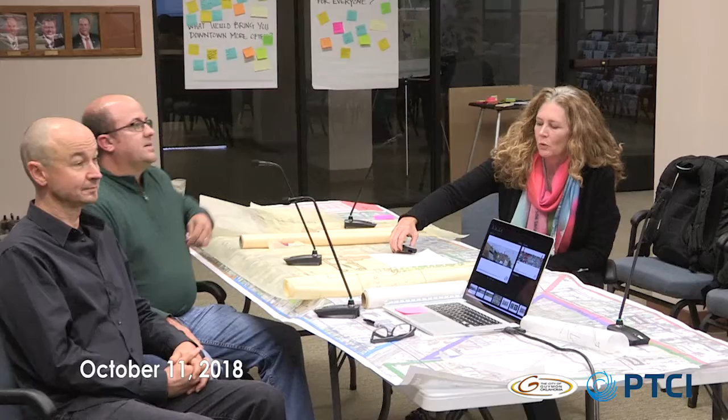Sure. So we heard a lot last night, and throughout the day, let me get this microphone a little closer to me. We heard ideas that people have for not just what they expect their streetscape to look like, but how they expect to use their streets within downtown and what some of those changes might look like.

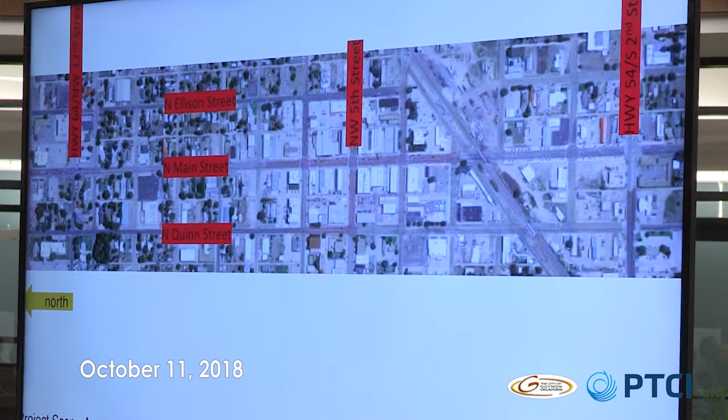So hearing all of that, we looked at the overall study area, which goes from Highway 54 all the way over to Highway 64, which is also 12th Street. And we're focused mainly on Main Street, but because of the two parallel streets, Ellison and Quinn, and how these land uses all relate to each other, we looked a little bit beyond and took into consideration the side streets.

We did focus on what we call the core area, which is really around 5th Street and 4th Street because of the concentration of commercial uses right there, as well as the brick streets that people are so familiar with. So a lot of what you're going to see in these next few slides are options for the way that the streetscape could be addressed along Main Street.

So we're calling that particular area Type 1. We're looking at 4 options for the segment of Main Street that is between 4th and 5th, and then all the way up to 6th and down to 3rd. You'll see some other labels on there. Type 2 are the side streets. Type 3 would be the parallel streets of Ellison and Quinn. And as we get more input from the community, that will influence how we think about other segments within this overall study area.

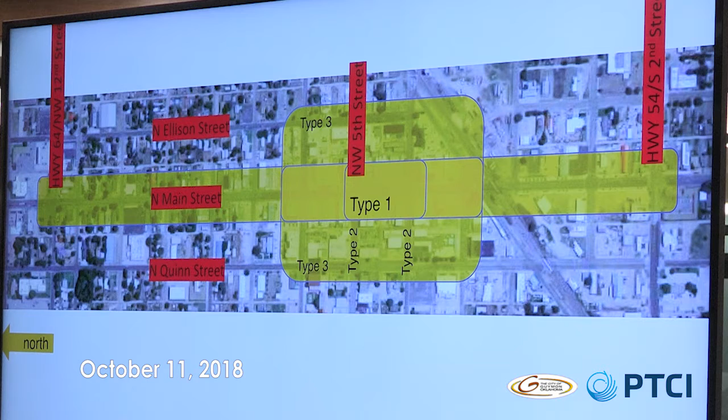So again, we're focused on Type 1 this evening and a little bit of Type 2. That's a close-up of that. You can see Main Street running from left to right there. Right in the middle between 4th and 5th is the American Theater. That marquee, we think, is a pretty cool feature in your streetscape and something to be highlighted, and a key element to always make a focal point within your streetscape.

So just looking at what we're calling Type 1, this is a quick sketch on basically your cross-section. The laser doesn't show up on this screen, but this is a cross-section. The heavier lines on the top and bottom of the page would be your building edges. So everything you're seeing illustrated in between, we're taking full advantage of that space on the street that is face of building to face of building.

And so this is essentially option 1, keeping your current cross-section intact. The kinds of things we're suggesting here are ways to introduce some landscaping, and those would be taking some of the parallel spaces and bringing that curb out to the travel lane where you have some opportunity to plant some trees and give some more canopy to the street. You're also seeing those at the corners, options there to be able to anchor that.

In all of these options, we are suggesting that we do what's called bump outs or bulb outs, and it's a way of bringing the curb line out closer to the center lines of the street so that you're actually making those crosswalks shorter and making it safer for pedestrians or easier for pedestrians to get from one side of the street to the other. In some cases, you're going from a 50-foot crosswalk that you have today and dropping to 33 feet or less. So it gives you some savings in that distance, but also gives you that room for landscaping.

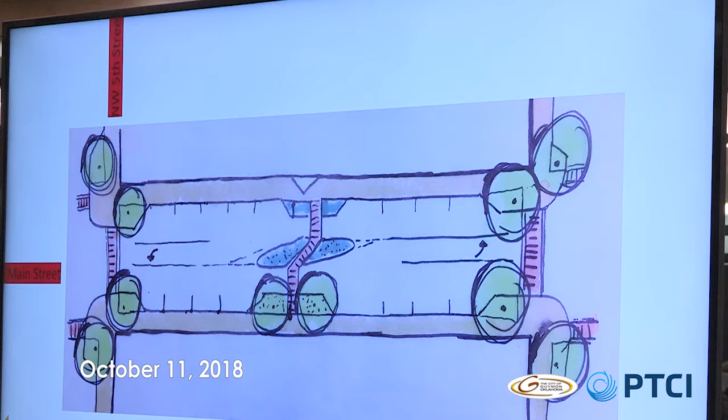If you're wondering what that feature is in the center, that's taking that area that's currently striped in gold paint and suggesting a very short median, and we call them pedestrian refuges.

It's just a place where a pedestrian can cross mid-block, get to that midpoint, and with a landscape median, have a place to actually stop and look at the direction of traffic coming the other way and continue on across. So they're not out there floundering in the middle of the street with traffic coming from either direction. Those are fairly minimal changes to make it more pedestrian friendly and introduce more landscaping.

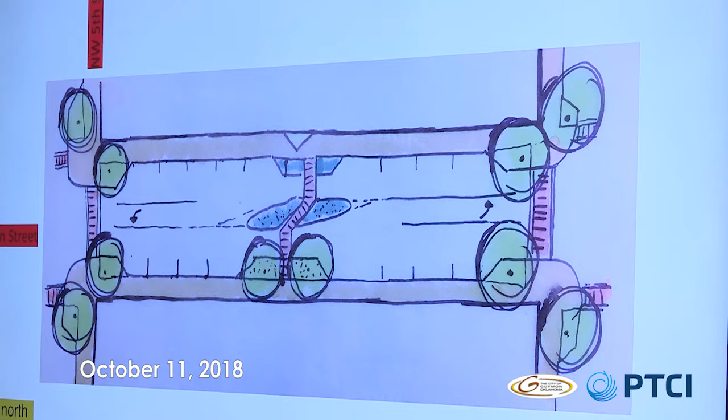You're keeping roughly the same parking spaces that you have out there today, with a couple of exceptions. So we think in our counts we are losing a couple spaces. Here's some illustrations of what those really look like on the ground. The one on the left is more diagrammatic. The one on the right is an actual constructed street cross section, so you can see how the pedestrian movement is facilitated with that short median.

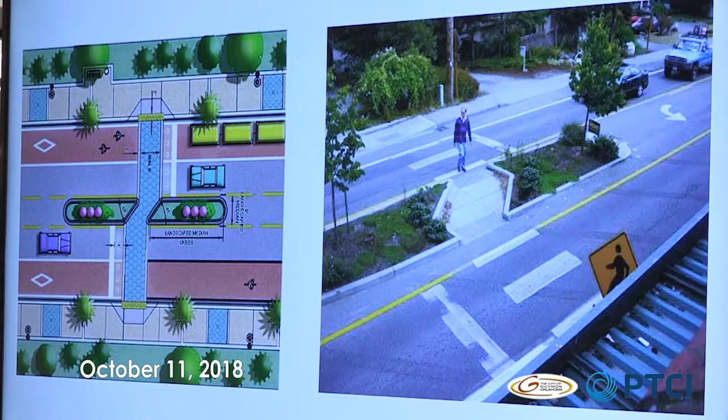Second option also indicates the idea that you would convert that striped section to a median, still with the changes to the corners so that you have the shortened crosswalks and easier movement. The turn lanes are still in place.

Here we are looking at ways of just trying to grab some of those parking spaces at an equal spacing, respecting where the lighting is down the street. We're doing that in all cases. But it's an alternating pattern with the street trees and the lighting, a way to introduce trees as an alternative to those canopies. It may be that as we study this further, you may be able to have a combination of canopy and street tree, but those parallel spaces converted actually helps create those spaces for street tree planting.

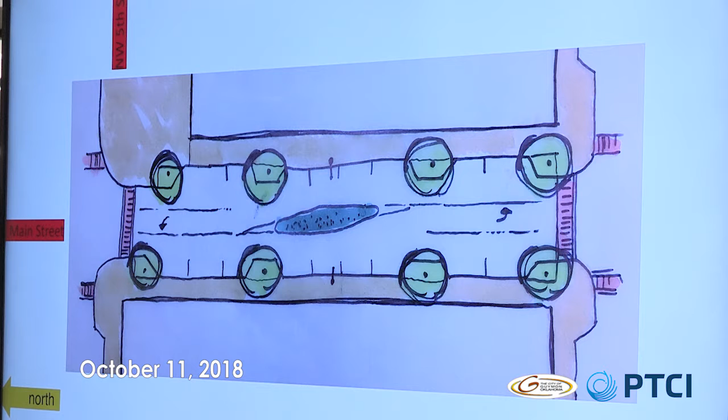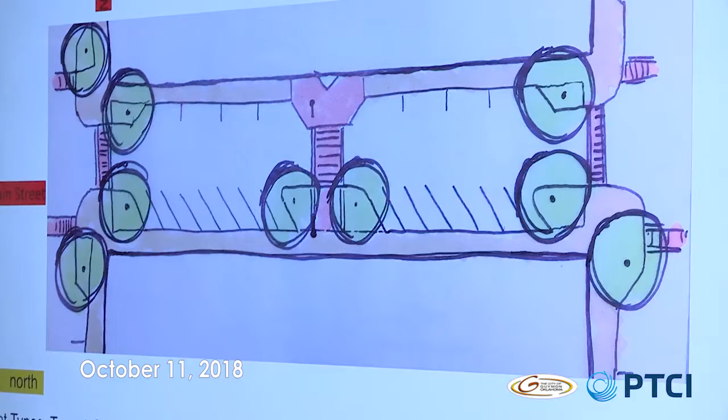Third option, some of those same characteristics are here. The lights are maintained, the new crosswalks at the intersections are maintained. We're also showing a mid-block crossing here. But the biggest difference is the traffic counts we're looking at may not warrant these turning lanes onto the side streets. If you were able to convert back to a 2-lane street without the turn lanes, that gives you ample room to have parallel parking on one side and angled parking on the other to increase your on-street parking. At the same time, you're introducing some places where landscaping can occur.

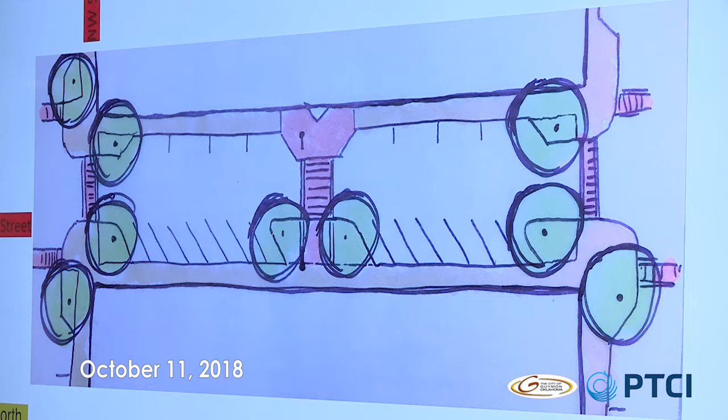And then finally, the last option: we heard a lot from folks last night about being able to slow down traffic, make it even more pedestrian friendly, and find ways to introduce landscaping and some street furnishings. Maybe it's places for outdoor dining associated with the restaurants that are along the street or will be in the future. This is a combination where you see parallel parking and angled parking. Again, the turn lanes are gone, which is where you're getting that space to create this.

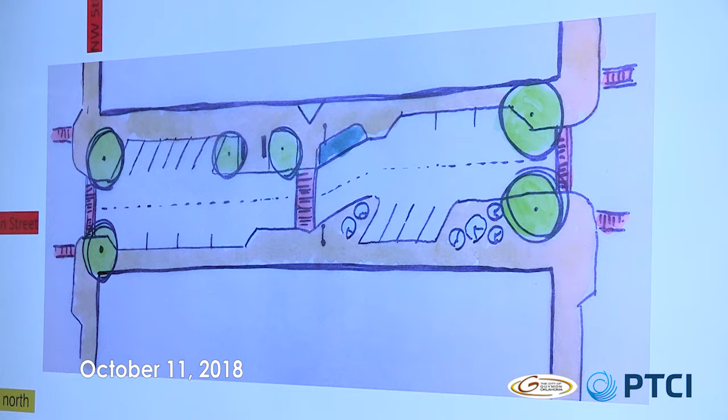But you also should notice a shift. As you leave one intersection, you're more towards the east side of the street, at the top building. Then mid-block, the traffic would shift, and you'd actually be driving closer to the buildings on the west side of the street. That shift actually goes a long way to slowing traffic down. That, in combination with introducing the vertical landscaping and some other elements, also causes people to slow down. So those pieces are there as well.

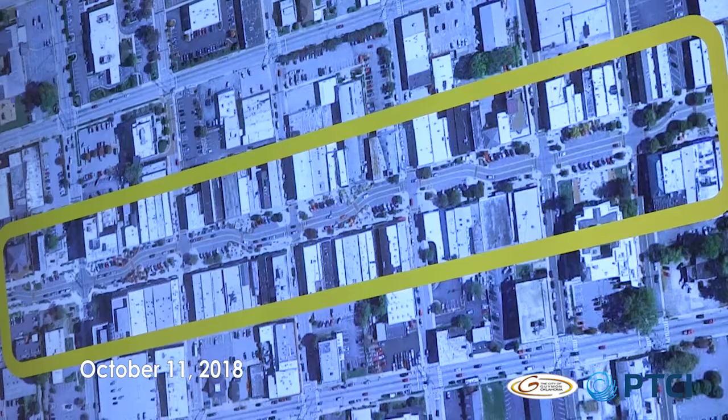That's something we have seen executed well in other cities. This is about a 6-block area in Hendersonville, North Carolina. We show you this because they did it years ago, and it's grown in and really gotten established. So you can kind of see, if you look closely from block to block, how it shifts. As you go through the intersection, you're not shifting - it all happens at the mid-block point.

So we think you've got room to do that if some of those turn lanes go away, to be able to change those curb lines and start to have some of those spaces for a better experience along that street. One of the reasons we want to promote that, whether it's this form or one of the others, is giving people a reason to be out on the street enjoying the outdoors. When people see people and that activity on the street, it's a magnet for other people, and that's good for business. From an economic development standpoint, when you can create these active streets where people are just enjoying being there, more people want to be there as well.

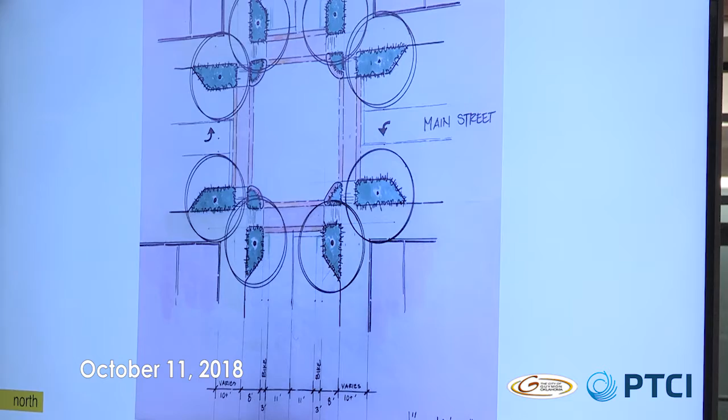So this is a close-up of one of those intersections I was describing. Again, we're not talking about dramatic changes, but just pinching those corners in a bit and making those crosswalks shorter. That's where you stand to gain.

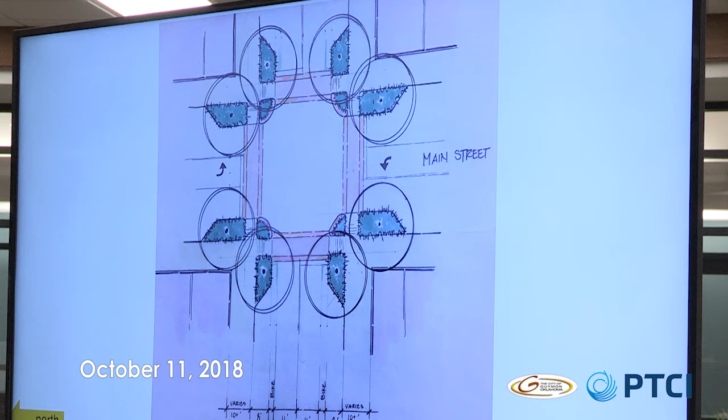I was wondering if I could ask a question. We've got great light standards downtown, not only throughout the corridor, but they're very highway oriented. They're high, closer to a Cobra head design. Has there been any thought put more towards a pedestrian scale light fixture that might warm it up and make that a little friendlier? They're great lights down there, but they're just way up there, not down at the level where people are.

Right, and we see that a lot. Sometimes the obvious answer for some folks is to add an alternating fixture with additional lighting, because you already have so much lighting. That might not be what you want to do. But as we go through this, sometimes more landscape level lighting and uplighting of the landscape or other vertical features might actually add that layer of lighting that highlights things at that pedestrian scale. So you accomplish it with lighting, but in a different form. Maybe lighted bollards or something like that, a lot of different forms, but that's something we can look at as well.

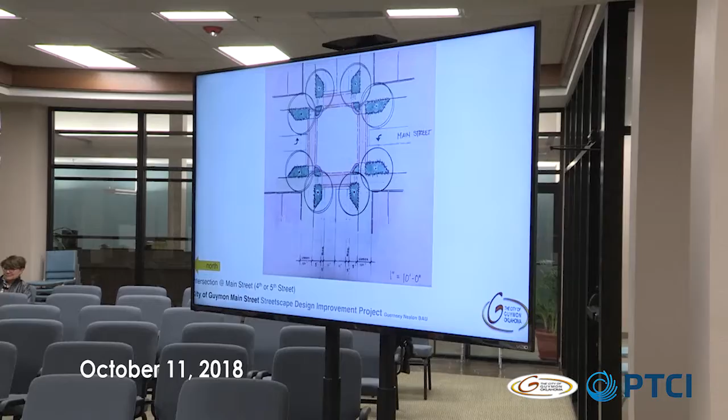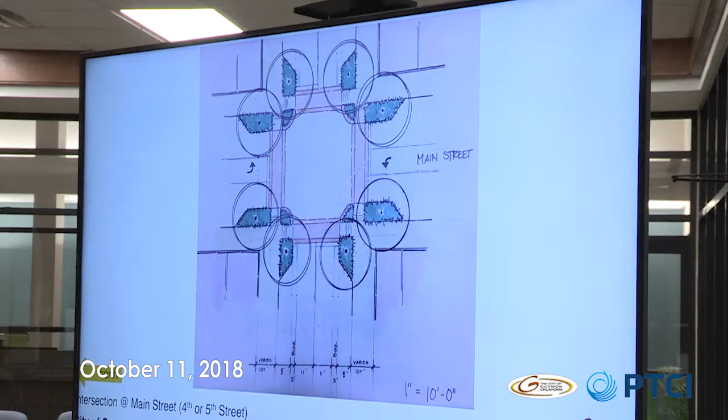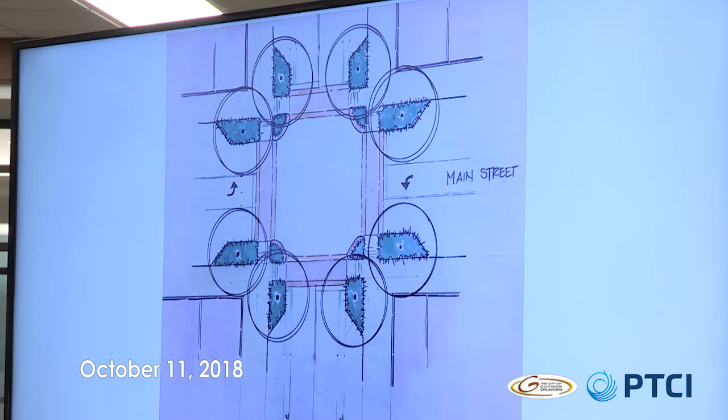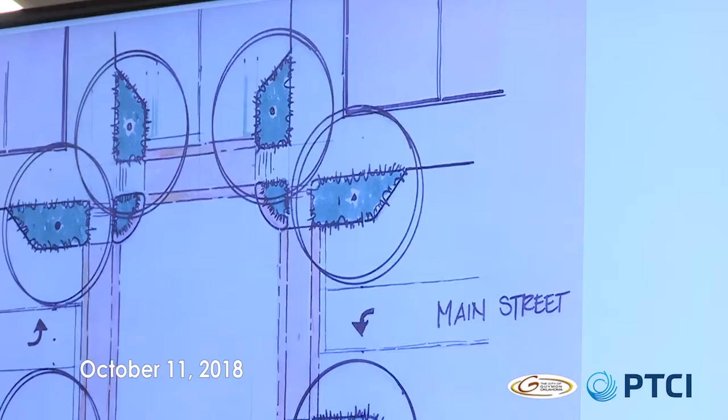The side street, where the brick streets are, 4th and 5th, we looked at that, and in your comprehensive plan there's a suggestion for accommodating bike and pedestrian movement on one or more of those streets. That cross-section, because of the current vehicular lanes, gives you a 14-foot width from center line to the edge of your parallel parking. You can keep your current cross-section where your parallel spaces are and change the pavement markings to highlight where an obvious bike lane would be. With enhancements to your pedestrian paths and striping that delineates the bike lanes, you can accomplish what you're describing in your comprehensive plan, calling it complete streets in some instances. We think you have the width there to do that, and that's what's illustrated with those dimensional lines across the bottom.

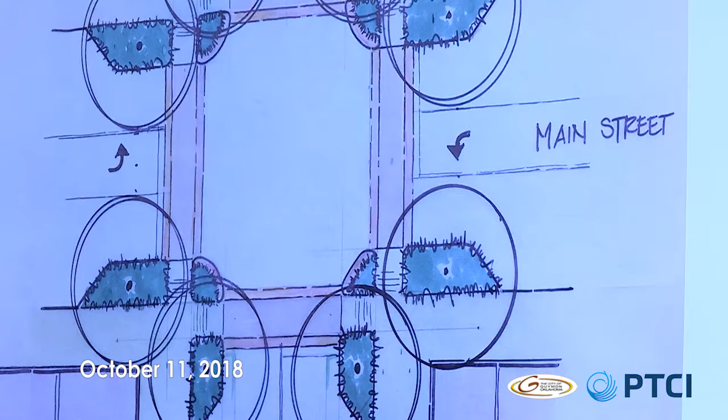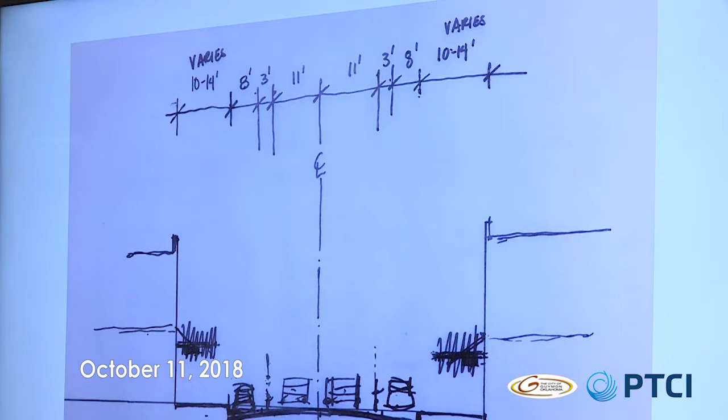Do y'all have anything to add? Okay, so that's a very messy sketch of the same thing. You can kind of see the on-street parking, the two cars driving in either direction in the center, very skinny bike lanes in between them, and sidewalks with no pedestrians yet.

So now there's plenty of details that we have contemplated that Hans is going to talk about that have a more architectural component to them. One of the questions we had was, based on feedback in our community conversations over the last few days, there are people who really enjoy what the awnings out front on some of the buildings achieve for us in terms of shade, more pedestrian-friendly scale, helping control a little bit of the wind.

One of the options we offer is the idea that we could design an awning applied to the buildings over this 2 to 3 block zone of the core of Main Street, something specifically designed for downtown Guymon, which would bring a sense of intention to the awning elements. They could also provide additional downlighting, a place for a system of signage that makes wayfinding easier, and makes it easier for the various stores to advertise and so forth. So we offer this as an option to consider.

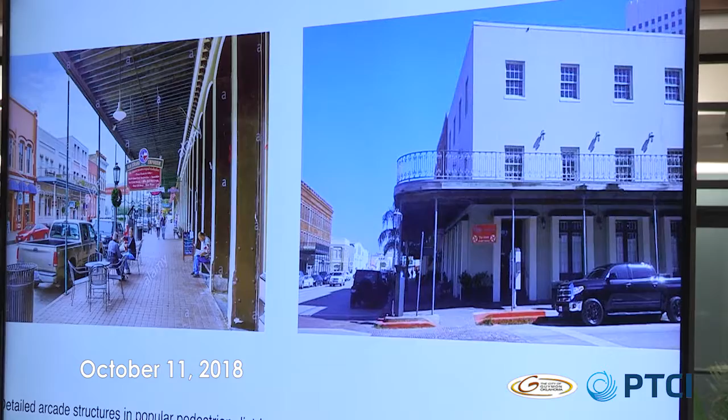There are some really beautiful precedents, especially through the southern half of the United States, the South and the Southwest, for these types of awnings that look intentional and carefully designed. Here are a series of images from Galveston, Texas, specifically the Strand, where you see signage, similar to what Meg was talking about earlier, giving a greater sense of intentionally creating places for people to hang out, tables and chairs, benches, signage to invite people into the stores. Here on the left you see again that sense of intention with designed signage, and at night those arcade zones can really become something special for evening lighting.

When we start to talk about specific street trees, Darren here has a few thoughts to share. When you take a look at street trees, you want to make sure the size is appropriate, the width. Trees have different canopy structures, so sometimes they grow wide, some grow narrow. So when you have limited space from the building face out, you want to make sure it's not going to grow too wide.

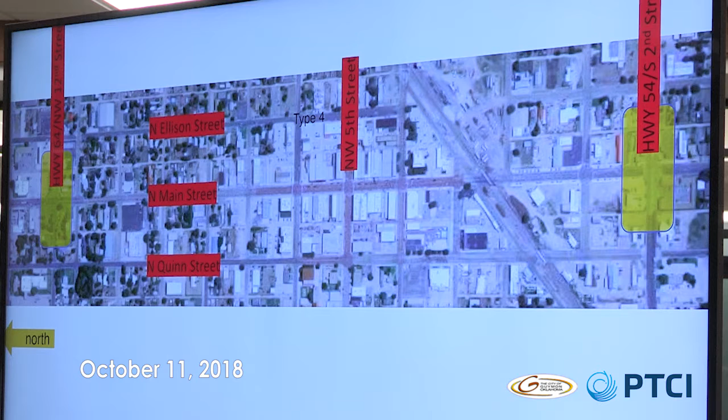And then we've also been looking at the gateway conditions to Main Street. As to the south you have South 2nd Street, and the northern edge you have 12th Street, and what might be something that really gives a sense of celebration to those thresholds as people move into downtown.

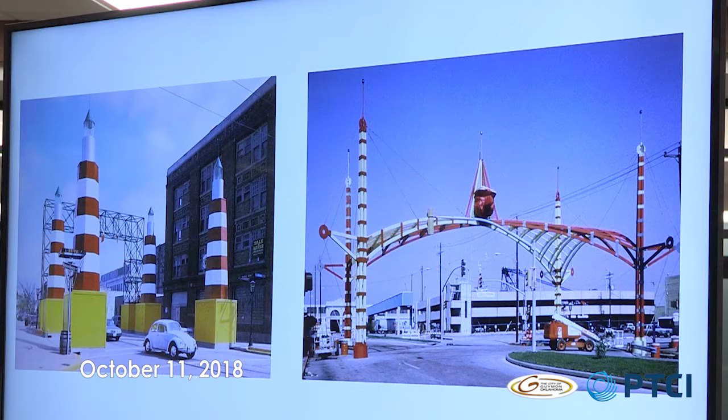And again, we look at some examples that have been built in other places. Galveston, years ago, built these gateways. They invited famous architects from across the world to design gateways, which they constructed. Some of them still stand today, but they just give you a sense of threshold, a sense of celebration, and a sense of defining the edges of this very special Main Street district.

And then lastly, a lot of conversation and feedback from the community has also circled on the question of, can we have somewhere carved out for ourselves what we're going to call a civic green. And when you see the image up here on the screen, that green square gives you a rough idea of what we believe proportionately would be an appropriate size for this part of Guymon's Main Street.

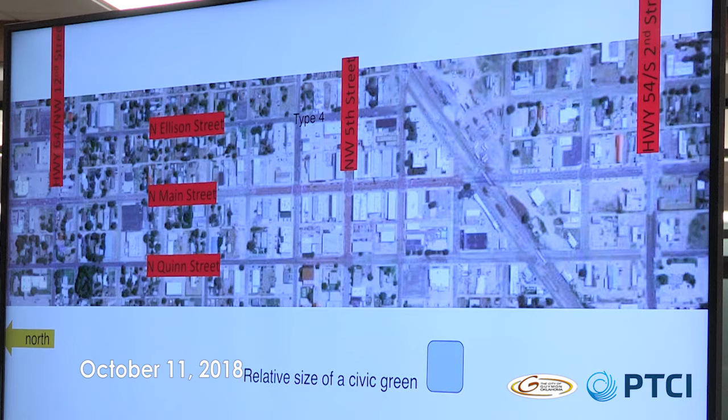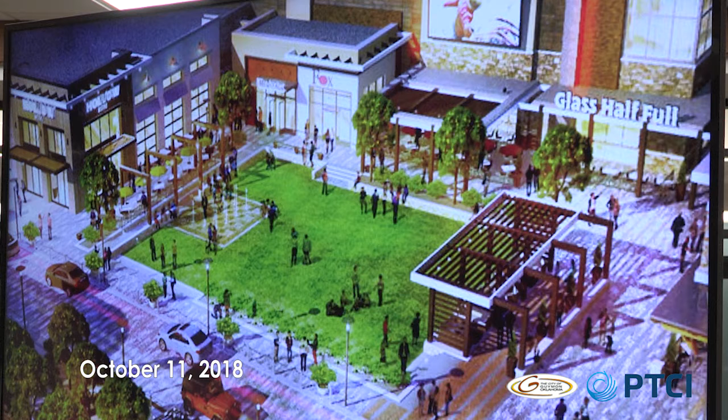We're not here to tell you where this could go, but more importantly, just give a sense of magnitude. There are some fantastic examples across the United States and beyond that give you a sense of what it can do for a community when you have a civic green where people can commune and celebrate. You have bands set up, a band shell, but it really has this chameleon-like quality where, throughout the different times of year, different activities can take place.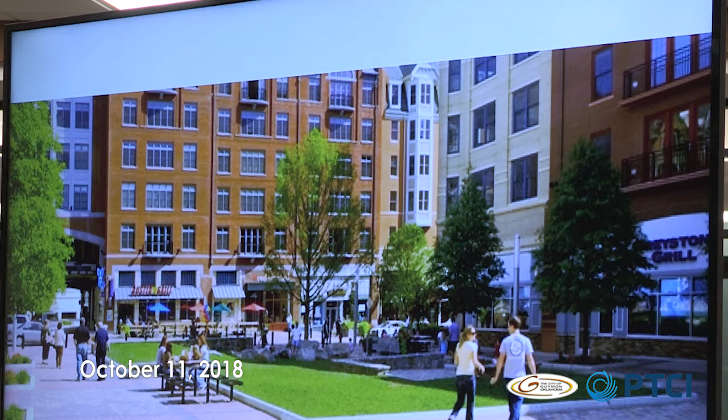You can have oversized chess or checkers out there, places for formal music as well as informal. Someone can just set up a little amplifier and a guitar and start playing. And then lastly, ideally you find a space, a town green or civic green that allows for a restaurant to set up and define an edge to that town green so that people can naturally spill outside and help activate that green space in the heart of downtown Guymon.

Of course, proposals like this can only succeed if you have these key components to see it through. Most importantly, and what we're seeing so much of over the last few days, is strong leadership. It's leadership at the city level, overall just community activists, people generally passionate about downtown Guymon, businesses along with the Chamber of Commerce, property owners, and of course your Main Street operations.

There are certain adjustments that can take place with regards to our policy or zoning initiatives that really need to be looked at in order to open the door for some of the types of activities and uses that could help add richer layers of activity here on Main Street. Design matters. Some of the examples we've just shown you are from within the state of Oklahoma or across the region or across the world. And then lastly, funding, right? What are those key sources, whether locally generated, regional, state, or federal, that can help make this happen.